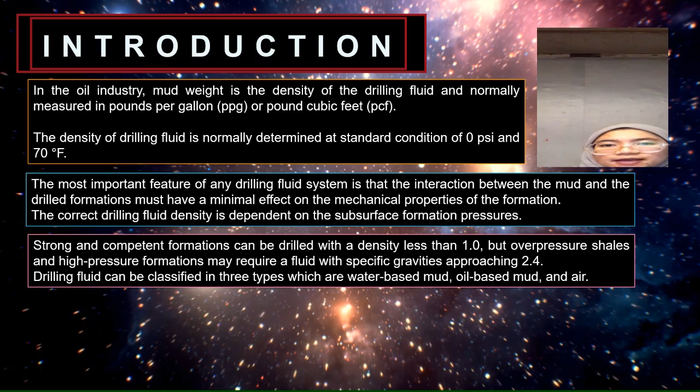Drilling fluid can be classified in three types, which are water-based mud, oil-based mud, and air. Air drilling, such as mist, foam, and stiff foams, is used only in very specific or limited applications. Water-based drilling fluids are the most commonly used mud system. It is less expensive and less difficult to maintain than oil muds.

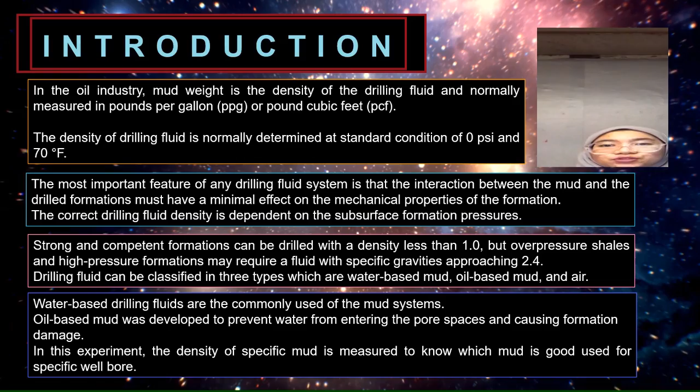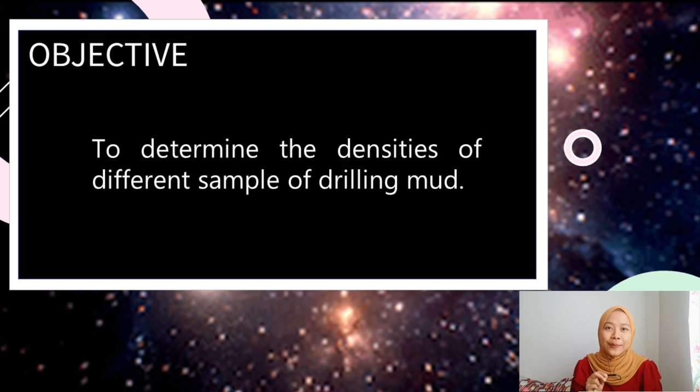In addition, oil mud was developed to prevent water from entering the pore space and causing formation damage. Several advantages of oil-based mud are shale inhibition, reduction of torque and drag problems, resistance to chemical contaminants, and etc. In this experiment, the density of specific mud is measured to know which mud is good to use for a specific wellbore. So the objective for this experiment is to identify the density of different samples of drilling mud, which in this lab we are using oil-based mud and water-based mud.

Now we go to the theory for this experiment. The drilling mud density experiment is a reflection of the density of mud during the drilling process, which is performed to control an adequate hydrostatic pressure so influx from the formation can be avoided. Density measures fluid weight per unit of volume, which industry measures in pounds per gallon, or ppg. Drilling fluid is designed to reduce the damage effect on the formation and equipment while making sure that the rotary drilling can go deeper without increasing the temperature of the drill bit.

Besides that, it is to avoid an excessive loss of returns to the formation and to fulfill the duty of opposing formation pressure. In the field, the mud balance and hydrometer are frequently used to determine the density of mud, and usually the density is reported to the nearest 0.1 ppg.

The first section for this experiment is using a mud balance. This mud balance is designed so that the mud cup at one end of the arm is balanced against the opposite end. One end is installed with a sliding weight rider which can be moved along a graduated scale. A level bubble is mounted on the beam to avoid any error during measurement. Bubbles can significantly reduce the density of the fluid, hence causing an error. The density of fluid containing entrained air or gas can be accurately measured by using a pressurized fluid density balance.

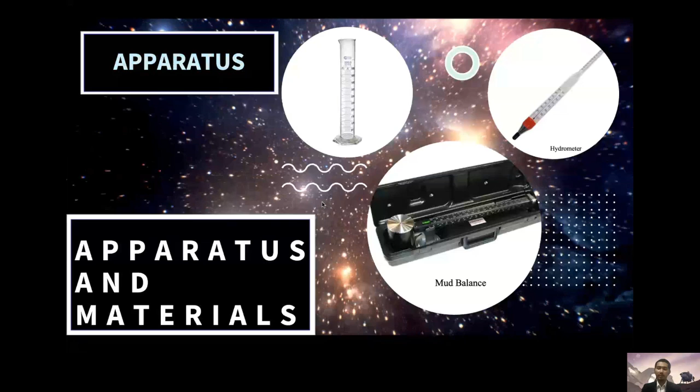Now I will proceed to the apparatus and materials, also the procedure, and last but not least, the result for this experiment. First of all, for the apparatus that we will be using for this experiment, we have three apparatus. First is the measuring cylinder to measure the materials, then the mud balance, which is the equipment that we use for the first experiment, and the hydrometer, which is used during the second experiment. As for the materials, we will have two types of material. First, the water-based mud, and second, the oil-based mud.

Okay, proceed to the procedure. For experiment 1, determination of drilling mud density using the mud balance, as I stated before. Before the experiment, we need to ensure the accuracy of its reading by filling the cup of the mud balance and testing it with water first. This is done in order to reduce the error produced during the experiment. As for the procedure, this experiment is rather easy and simple. We will have three steps.

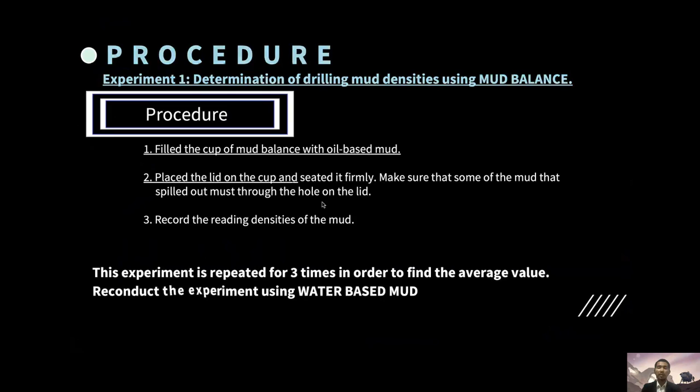First, fill the cup of the mud balance with oil-based mud. Second, place the lid on the cup and seat it firmly. Make sure that some of the mud spills out through the hole on the lid. Third, record the density reading of the mud. This experiment was repeated 3 times in order to obtain the average value. The average value, properly calculated, will reduce the error produced during the experiment. This experiment will be reconducted with the same steps and the same procedure, but using water-based mud.

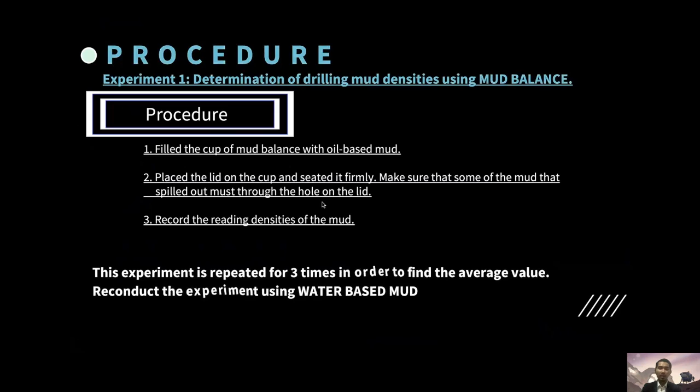Okay, proceed to experiment 2, the determination of drilling mud density using hydrometer. Before the experiment, we will need to measure 400 milliliters of oil-based mud using the measuring cylinder. Second, we will need to choose a suitable hydrometer that has the function of measuring specific gravity. And third, ensure the hydrometer is totally clean and dry.

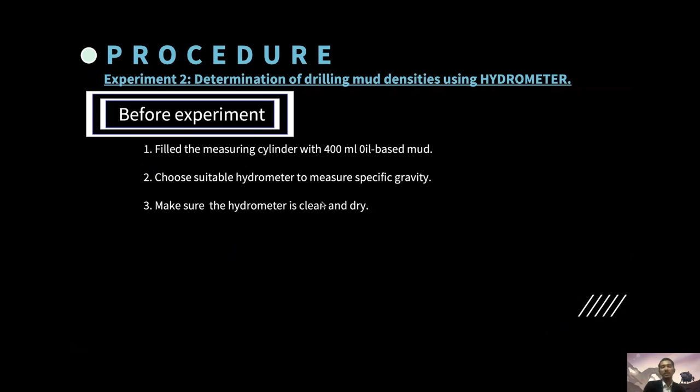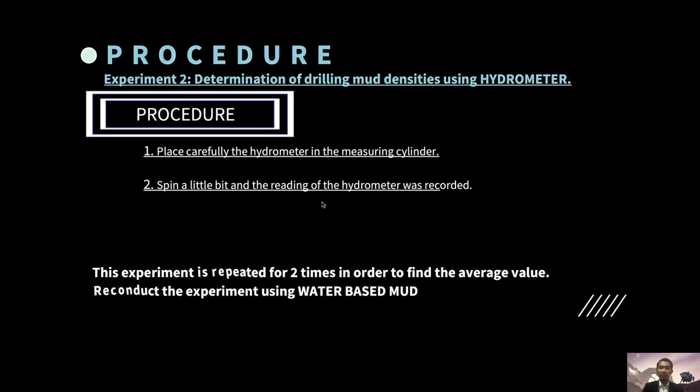As for the procedure, we will only have 2 steps. The first one is to place the hydrometer in the measuring cylinder that we measured before, and second, spin it a little bit and record the reading of the hydrometer. Simple, right? The experiment was repeated 2 times, with the same purpose as the previous experiment, which is to find the average value. And same as before, this experiment will be reconducted using the water-based mud.

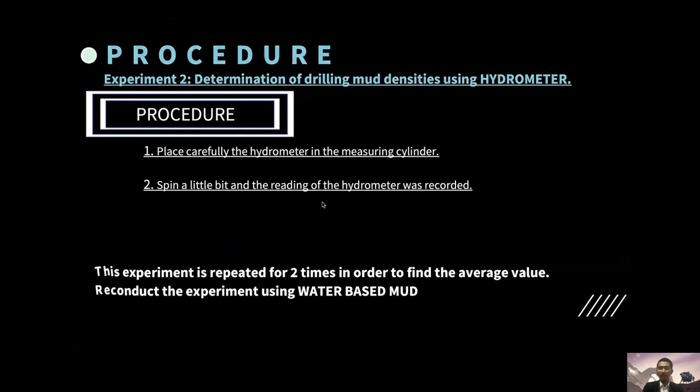Okay, done with the procedure, let's proceed to the result. Experiment 1. We repeat the experiment 3 times, right? So we will need to calculate the average value. To obtain the average value for the first and second experiment, we will be using a simple formula, which is the average reading. The formula is adding the values for test 1, test 2 and test 3, according to how many times you repeat the experiment, divided by the number of tests that you conduct. So the sample calculation is like this.

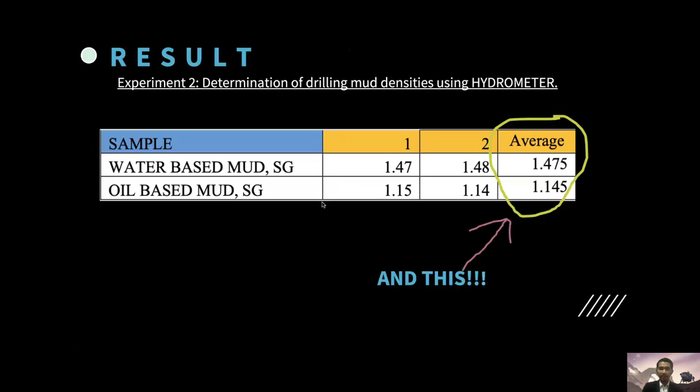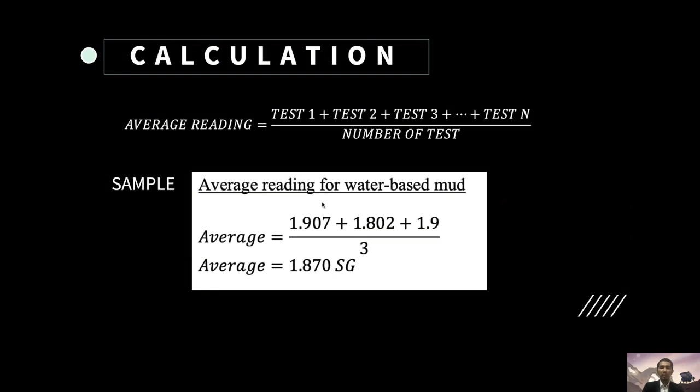Back to experiment 1. We have these tests: 1.9, 1.8 and 1.9. The average is 1.87. So the calculation will be 1.9 plus 1.8 plus 1.9 divided by the number of tests, which is 3. So the average value we obtain is 1.87 specific gravity. This will be applied throughout both experiments.

Next, we will need to convert the unit from SG to density. The formula is SG equal to density of substance over density of reference. As for the density of reference, we will be using 1000 kg per meter cube. To obtain the density of substance, we move the density of reference to the other side. Then the operation becomes specific gravity multiplied by the density of reference, and we get the density of substance.

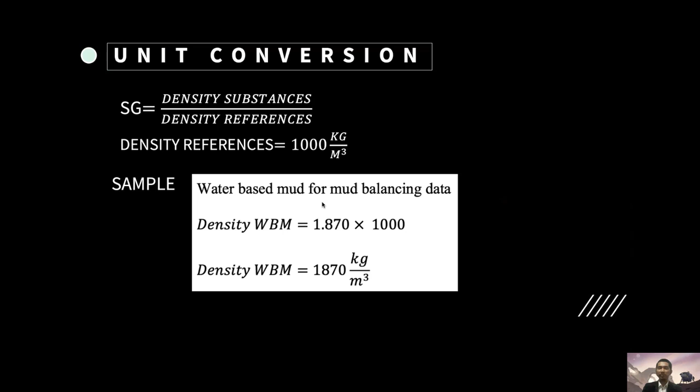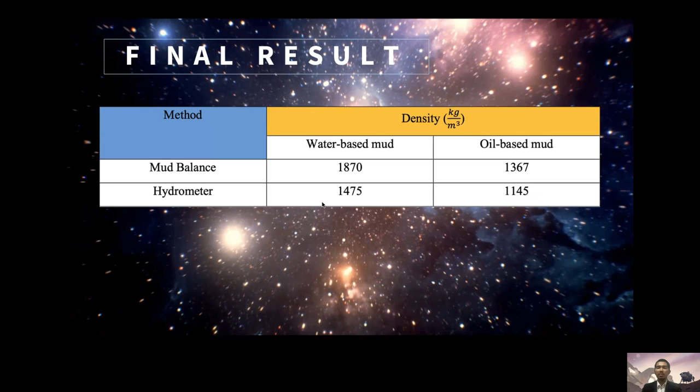As for the sample, the density of water-based mud, which is 1.87 as we calculated before, times 1000, we get 1870 kg per meter cube. After you calculate for both experiments, this will be the final result. The unit will be kg per meter cube, with the mud balance method for the first experiment and the hydrometer for the second experiment, for water-based mud and oil-based mud. And as for

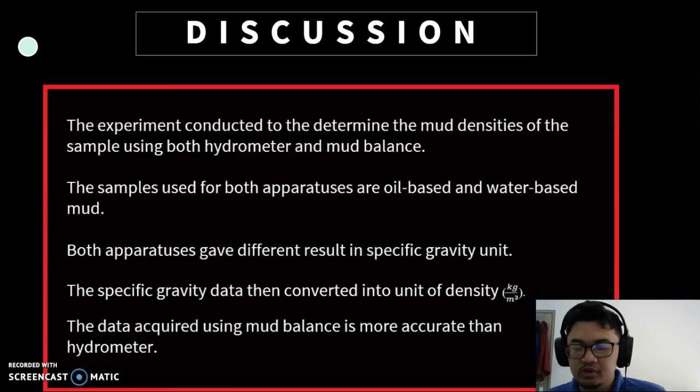Why is that? The experiment for each apparatus is repeated multiple times in order to gain more consistent readings throughout the experiment. Then the data gathered from the multiple experiments is added, resulting in an average density for each apparatus. Why is the hydrometer more unreliable than the mud balance equipment?

The hydrometer is inaccurate and unreliable due to the gelation of the sample during the data acquisition process. What is gelation of the sample? When the sample goes through the equipment, it tends to get stuck, then requires more or less pressure, which can result in a faulty result. The volume of space of the hydrometer may be occupied with gas and air bubbles from the sample, which can lead to inaccuracy in the data. That's why the mud balance is more accurate and more reliable than the hydrometer.

The hydrometer is also not reliable because it is not durable due to the fragility of the apparatus. Hence, the experiment cannot be repeated multiple times. Besides that, the hydrometer requires specific scaling for each fluid density to be tested. That means we need multiple hydrometers for each sample, and it takes time to calibrate the specific scaling for each fluid density that we must record for this experiment.

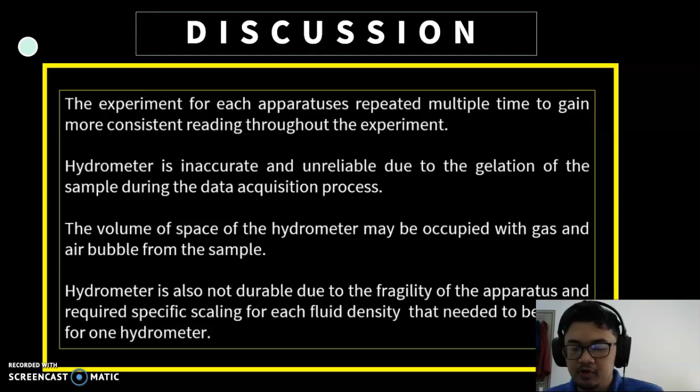So as a conclusion for the experiment, using the mud balance is more accurate than the hydrometer, and the result from the mud